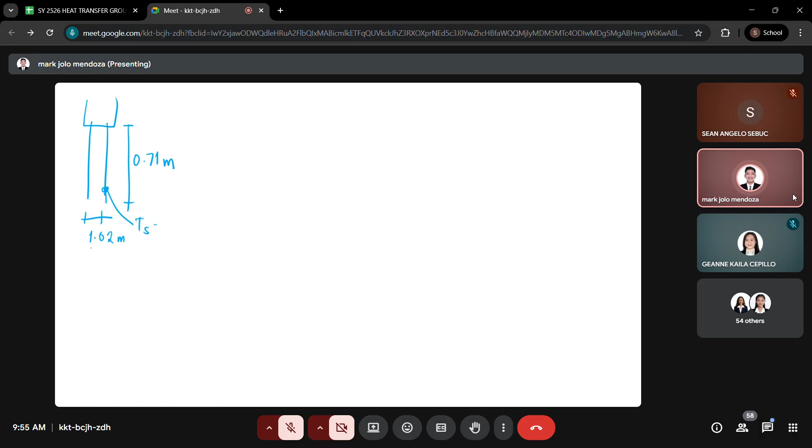And reaches a temperature of 232 degrees Celsius. So ito daw, glass fire natin, this is at surface temperature equals to 232 degrees Celsius.

The other side, itong room natin, if the room is 23 degrees Celsius, 23 degrees Celsius, the room temperature.

We are asked to find for the convection heat rate from the fireplace to the room. Convection heat rate, Q ang tinatanong.

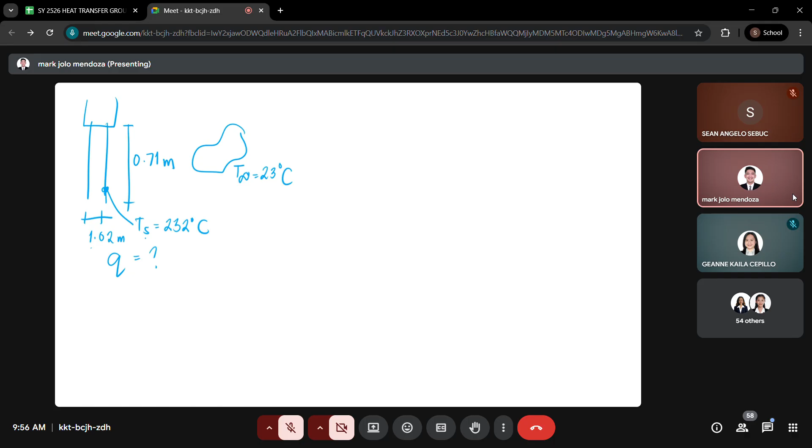Again, meron tayong glass door fire screen. So ibig sabihin dito sa part na to, meron tayong fire dito.

And then meron tayong glass door with a length of 0.71 and height of 1.02 meters, temperature 232 degrees Celsius.

Yung room natin sa opposite side ng ating fire screen is at a room temperature of 23 degrees Celsius.

We are asked to find for the convection heat transfer rate from the fireplace to the room.

So yan yung schematic natin, ganyan yung itsura. So let's have... oops, sorry.

Assumptions natin. Ano yung mga assumptions natin na pwedeng sabihin dito?

First, sabihin natin na itong surface temperature is uniform. Your Ts is uniform on the screen, on the fire screen.

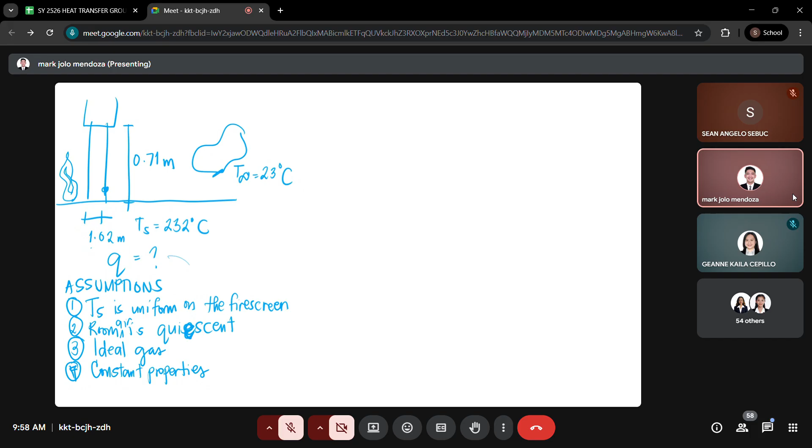Now let's establish the properties. Again, properties natin that we have to evaluate is under the film temperature.

Film temperature, 232 plus 23 all over 2, plus 273. That is...

Equal to 400.5 Kelvin.

Still, this is table A.4 kasi air yung ating kino-consider. You give me the values of your thermal conductivity, kinematic viscosity.

Thermal diffusivity, Prandtl number, and your thermal expansion coefficient.

Sige, para hindi na tayo mag-interpolate, we use 400 Kelvin na, para mabilis. You get the value at 400 Kelvin. Give me the value of thermal conductivity at 400 Kelvin.

33.8 po. That's 33.8 times 10 to the negative 3 watt per meter Kelvin.

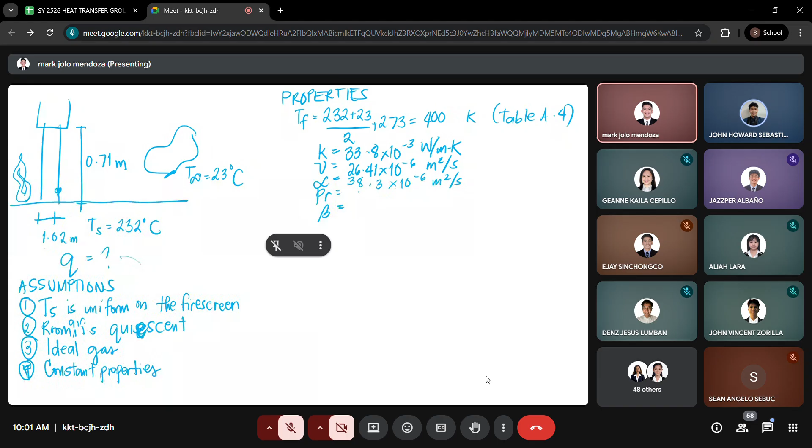Your Prandtl number? 0.690. And your beta. Again, beta is 1 over your film temperature.

2.5 times 10 raised to negative 3 po. Sorry, 2.5 times 10 raised to negative 3, K negative 1.

So we evaluate it now. So again, we are solving for the heat rate, the heat rate. So ano ba ang formula ng heat rate?

What is our convection heat rate formula? That is your convection coefficient times your area times surface temperature minus your fluid temperature.

Since we assume that this is under quiescent conditions, you solve for the Rayleigh's number. You solve for the Rayleigh's number.

Solve for the Rayleigh's number. That's gravity times your beta times Ts minus T ambient, L cube, over thermal diffusivity times kinematic viscosity.

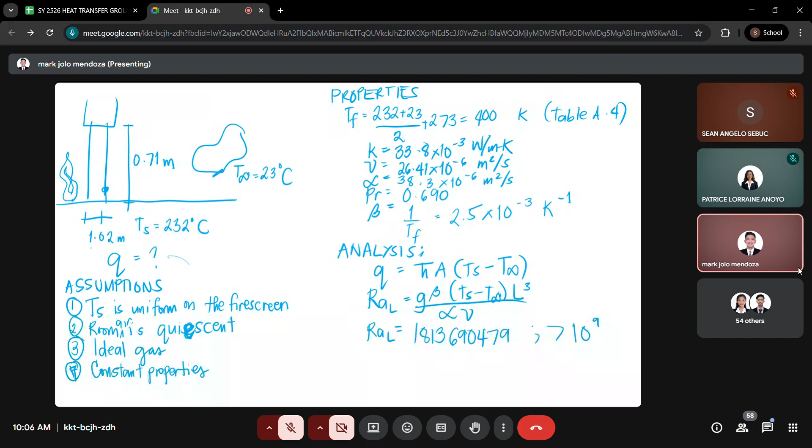This is greater than, di ba? Greater than this is greater than 10 to the 9. This is greater than 10 to the 9. And since this is greater than 10 to the 9,

yung ating formula that we are going to use is the formula of Churchill and Chu. Kasi yeah, we need to correct that pala kasi ito sinulat ba natin yun dito?

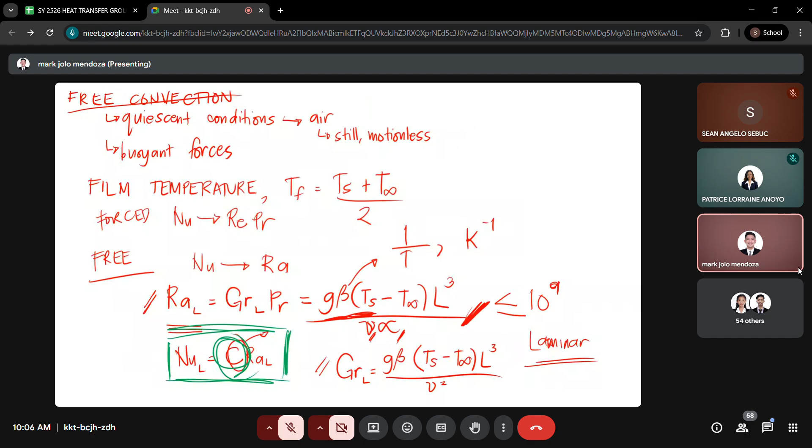Itong formula ni Churchill and Chu, this occurs in transition to turbulent flow. This Churchill and Chu, this is in turbulent flow. That is for greater than 10 to the 9.

Yes, this is for greater than 10 to the 9. Itong formula ni Churchill and Chu. Whereas itong pangalawang formula na presented on page 97, this is for less than 10 to the 9, or which

is in laminar flow. This is for laminar flow. So, we use the correlation of Churchill and Chu dito since siya ay greater than 10 to the 9.

So, we use the Nusselt number using Churchill and Chu. Churchill and Chu.

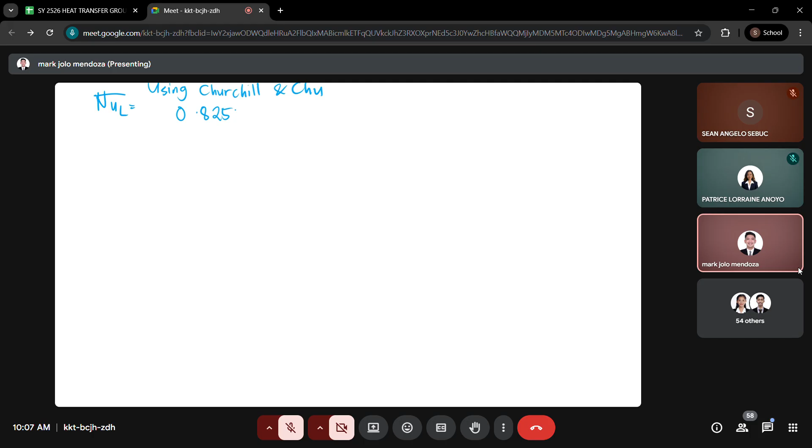We do have 0.825 plus 0.387, RA raised to 1 over 6, over 1 plus

0.492 over Prandtl raised to 9 over 16. Then itong buong ito is raised at 8 over 27. Buong equation is naka-raise sa square. Then you will get the Nusselt number.

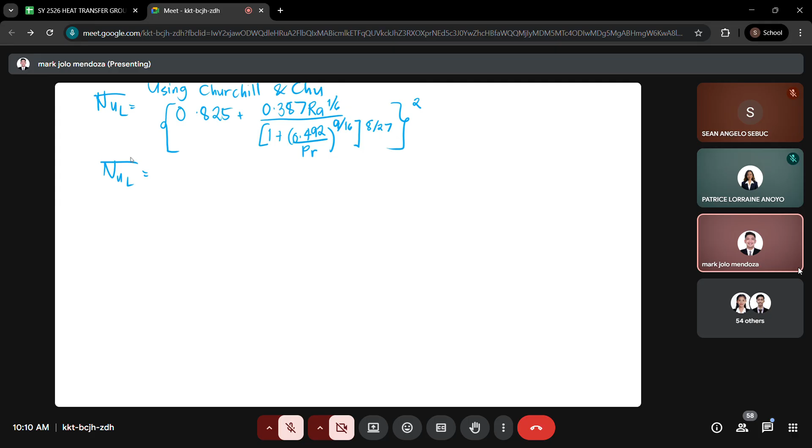What is the value of our Nusselt number? You substitute yung nakuha nating value ng Rayleigh's number dyan. Then we will be having our Nusselt number. That is our Nusselt number equal to

Confirm nga ano pang ibang sagot. Magkaiba yung dalawang sagot. Anong sagot natin for Nusselt number? That's

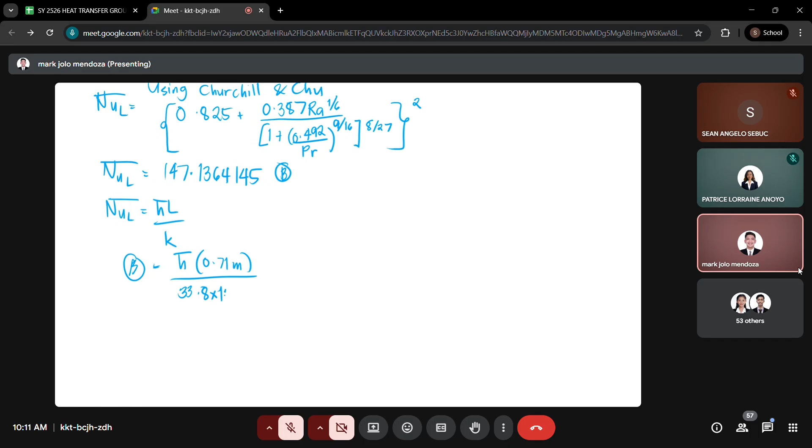147.1364145. Then again, to solve for our heat transfer or your convection heat transfer coefficient, that is HL over K. You substitute, let's say this is your B, substitute B equals H times your length equals 0.71 meters. Your K is equal to 33.8 times 10 to the negative 3 watt per meter Kelvin. Then you will be able to solve for your H.

Anong value natin ng heat transfer coefficient? Excuse me. 7.004522267 watt per square meter Kelvin.

Now you solve for the heat rate. Heat rate equals HA, Ts minus T ambient. Sorry, dito yan. So let's say this is stored in C. So C times 0.71 meters times 1.02 meters times 232 minus 23. 232 degrees Celsius minus 23 degrees Celsius.

We will be able to get our heat rate equal to 1060.18908

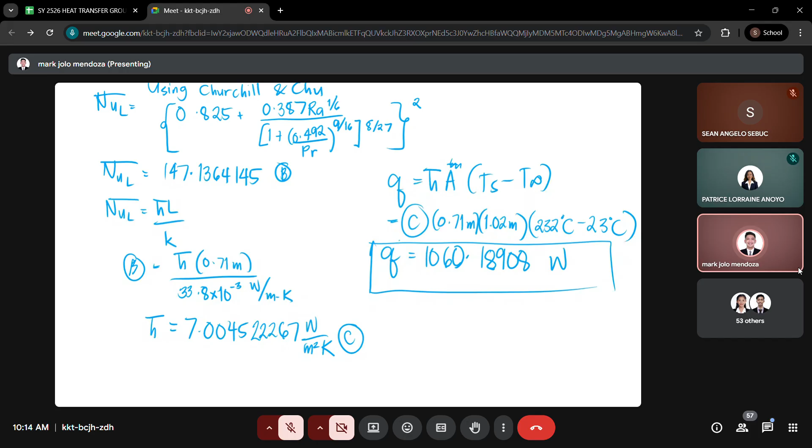So yan. I hope you guys get the same answer. You have to make sure that you understand the correlations. Again, ulitin natin yung mga correlations na na-discuss bago tayo mag-proceed sa third example.

Dito, nasaan yun? Itong formula natin for vertical planes, itong formula na to, itong hx over k, di ba? This is common. We know that this is your formula for the Nusselt number since simula nang discuss tayo ng convection. Itong formula na to, itong other formulas, ito, and ito,

This is when you are going to solve for the local Nusselt number. Again, pag sinabi nating local, you are evaluating at a specific point, X. You do not consider the whole length kapag local Nusselt number. So ito yung formula natin. You consider the Grashof and the Prandtl, or ito, maalin dyan. Again, kapag yan ay local Nusselt number.

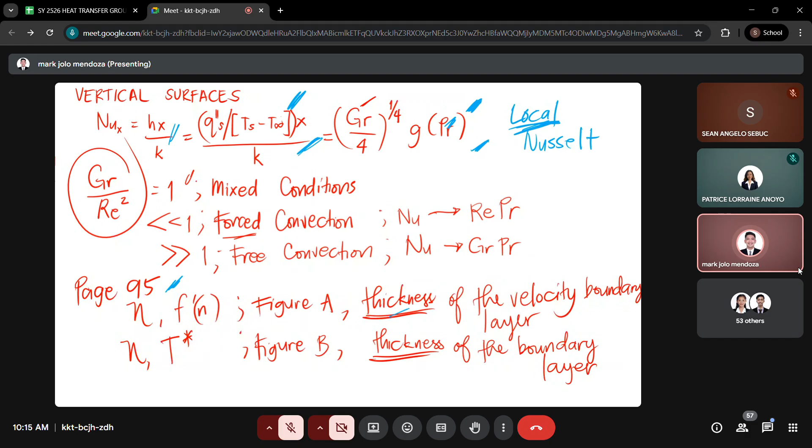Then, kapag ito dito sa page 95, this is when you solve for the thickness of the velocity boundary layer, you refer to the graphs. And then, Churchill and Chu, you use this formula to solve for the Nusselt number kapag turbulent.

This is average Nusselt number. In average Nusselt number, ibig sabihin you consider the whole length, average to, as well as dito. Average din yan. Average. Turbulent or laminar.

Turbulent sa unang condition, kay Churchill and Chu, then yung improved formula is for laminar conditions. And then, if it's inclined or inclined surface, same formulas, it's just that you paltan lahat ng involve ang gravity, you change all of those parameters into gravity cosine theta.

Then, for horizontal plates, presented yan in page 99, whether you evaluate it the upper heated part or the lower heated part. Then, presented din, pag long horizontal cylinder, presented ang C at N on page 101, yung table natin to solve for the Nusselt number, or you can use Churchill and Chu pa din to evaluate the Nusselt number.

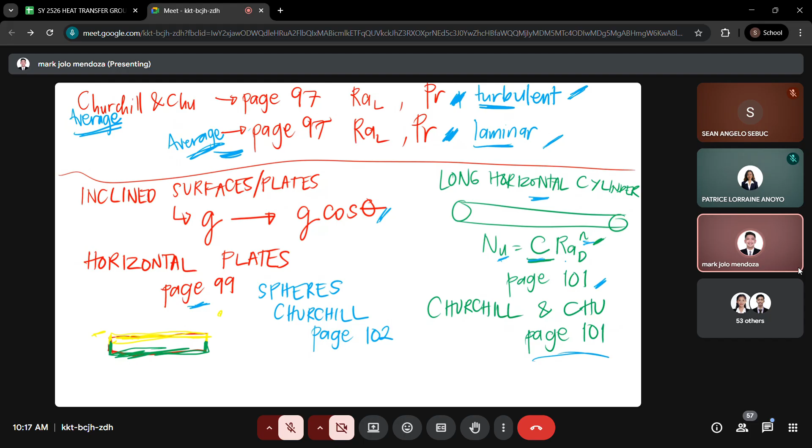Again, it will again just boil down to having the Nusselt number. Ang pinakaiba lang, sa forced convection, your Nusselt number is dependent on the Reynolds number. Dito, sa Nusselt number natin for free convection, dependent tayo on Rayleigh number. On Rayleigh number yung ating pino-consider.

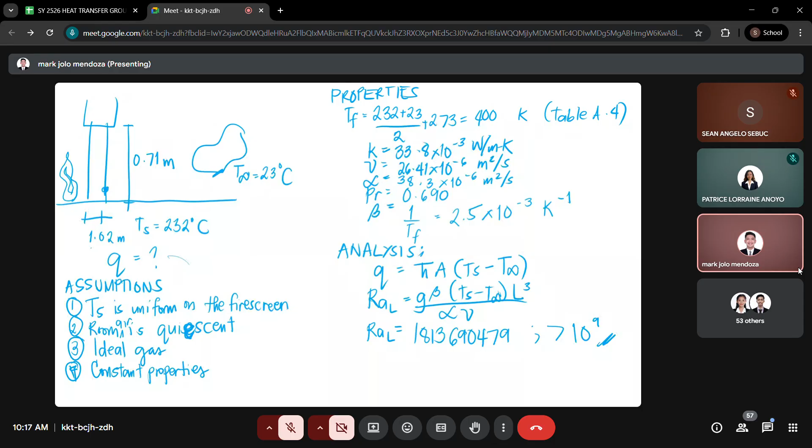Yun. So, I hope you were able to follow with these examples. Let's proceed with the third example. Third example is airflow through a long rectangular heating duct, 0.75 meters wide and 0.25 meters high. So let's have a rectangular duct.

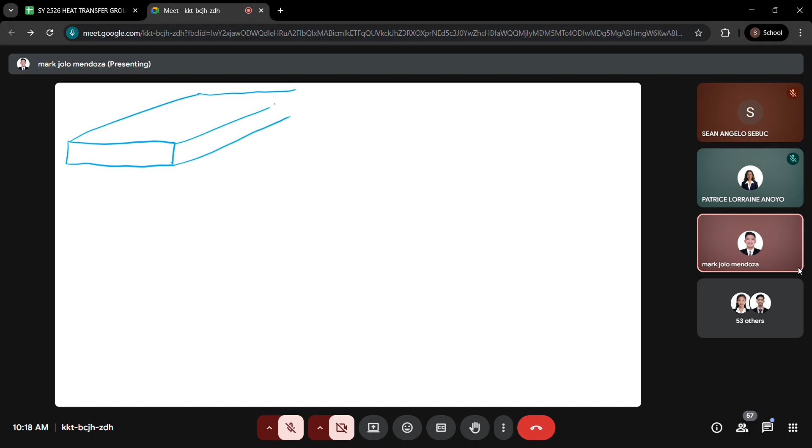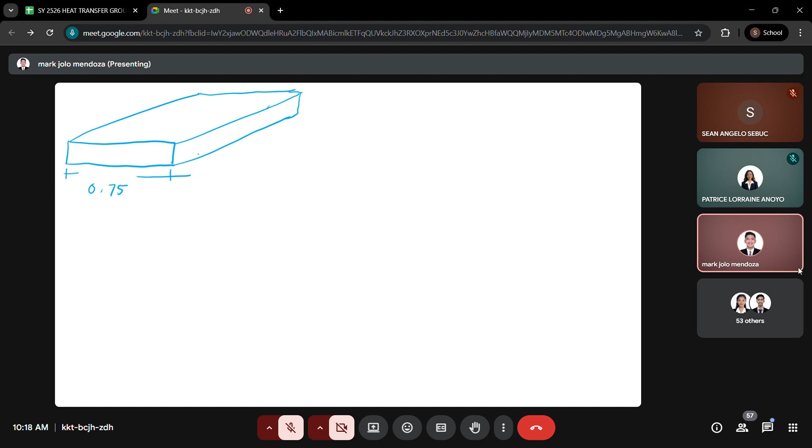That is 0.75 meters wide, 0.75 meters wide, and the height is 0.25 meters.

And maintains the outer duct surface at 50 degrees Celsius. The surface of the duct is 50 degrees Celsius.

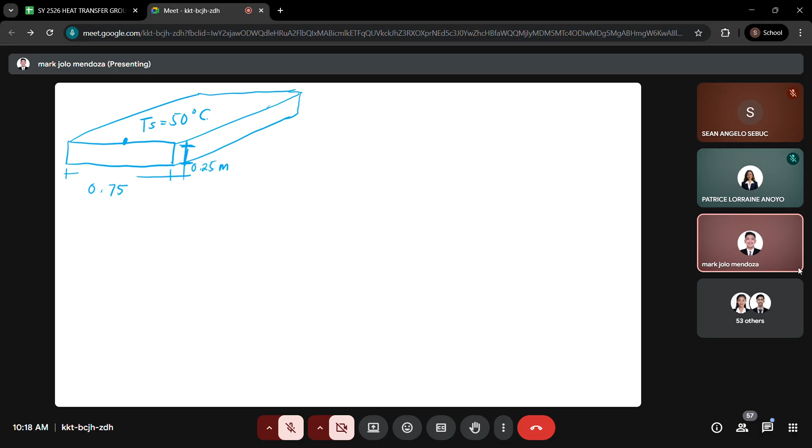If the duct is uninsulated and exposed to air at 15 degrees Celsius in the crawl space beneath a home, it's exposed to air, uninsulated, at 15 degrees Celsius, what is the heat loss from the duct per meter of length?

Heat loss from the duct per meter of length, so that's Q prime. The question is asking for Q prime.

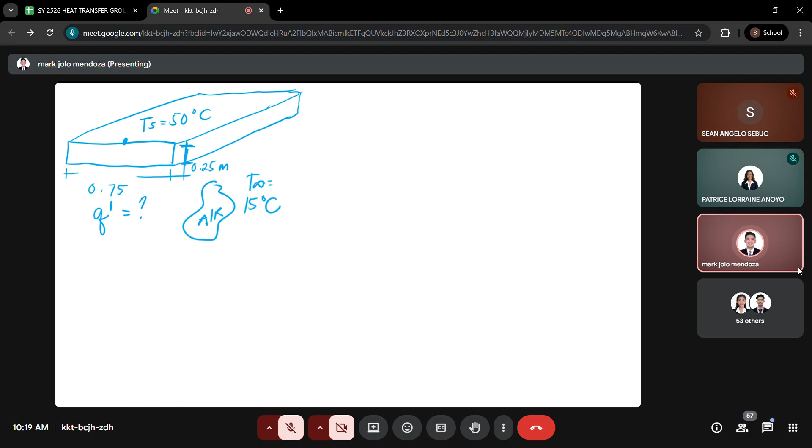Again, we have a rectangular duct that is 0.75 meters width and the height is 0.25 meters. The surface is maintained at 50 degrees Celsius, then exposed to air at 15 degrees Celsius. So we're asked for the heat loss or heat loss per unit length because this parameter wasn't given.

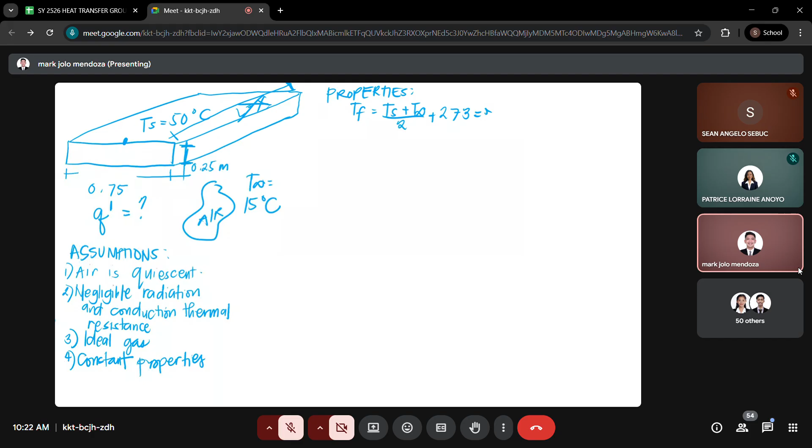From table A.4, give me the values of your kinematic viscosity, your thermal diffusivity, your thermal conductivity, your Prandtl number, your thermal expansion coefficient. Let's have these values.

Give me the value of kinematic viscosity. What is our kinematic viscosity? 16.4433 times 10 raised to negative 6.

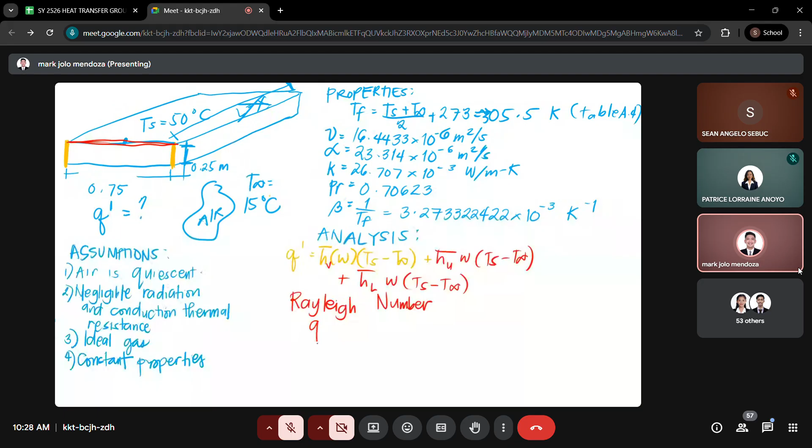This is your Rayleigh number, Ra, equals gravity times beta, Ts minus T ambient, times L cubed, all over kinematic viscosity times thermal diffusivity.

Now guys, since we are not given the length of our duct, you just solve for the numerical coefficient of this. You substitute - so we express our Rayleigh's number in terms of L cubed.

So you substitute: this is 9.81, 3.27 times 10 to the negative 3, this is 50 minus 15, then kinematic viscosity 16.443 times 10 to the negative 6, then this is your thermal diffusivity 23.314 times 10 to the negative 6.

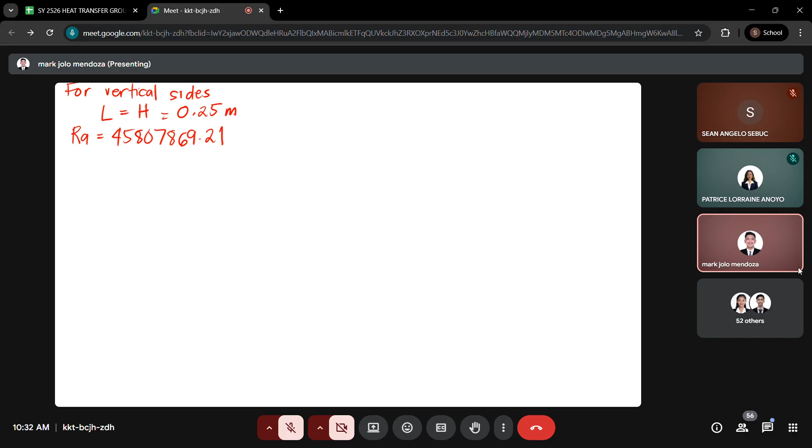Did you also get this one? This is also what came out for you. So, if this is your Rayleigh number, this is less than 10 to the 9. Therefore, this is laminar, right? Less than 10 to the 9. So this is laminar, so you will use to solve for the Nusselt number the second equation from page

95, if I'm not mistaken, that's page 95. The improved equation for laminar is 0.68 plus 0.670 Ra raised to 1 over 4, all over 1 plus 0.492 over Prandtl raised to 9 over 16, raised to 4 over 9.

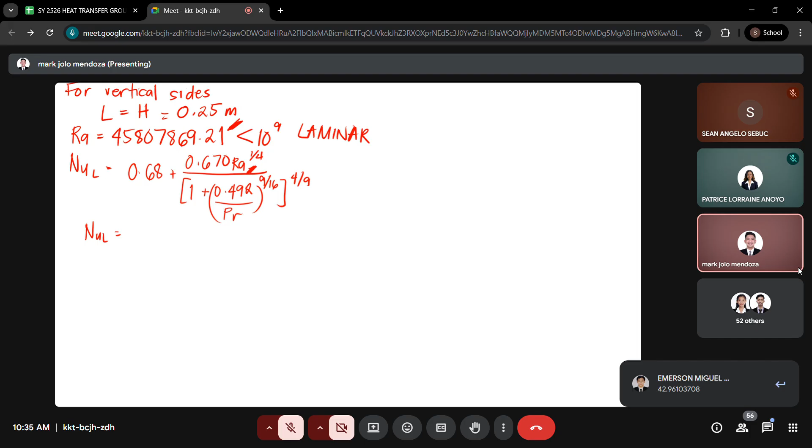So you substitute your Rayleigh number here, substitute it here, then we will get our Nusselt number. Our Nusselt number is equal to... our Nusselt number. Your Nusselt number is 42.96.

103708, 103708. Now again, you solve for your H. This is for the vertical plates: H times L over K, wherein your L again is 0.25 meters here. Then your K is 26.707. You substitute, you get your H for vertical.

Since we have two vertical sides, right? Two vertical sides. So our equation for heat rate per unit length is heat rate per unit length times two, for the two vertical sides. 1, 2, yes. So times 2 pala yon.

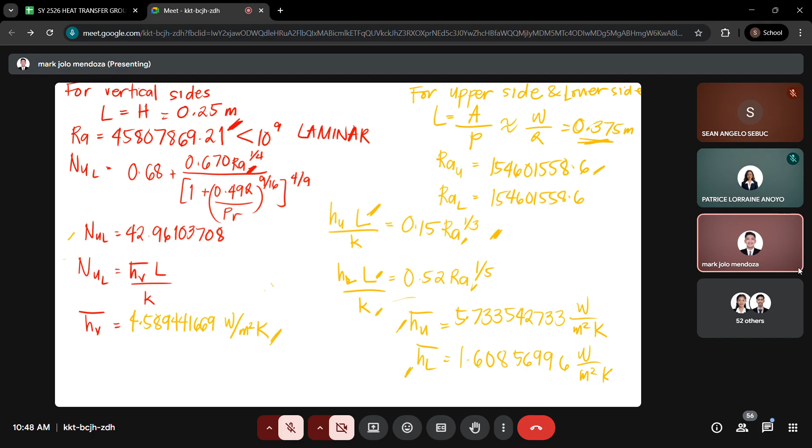Then here is 2 times HV, 4.58. You complete the values plus HU, 5.73, plus HL, 1.60. There, you solve for your heat rate per unit length.

What would be our heat rate? Heat rate per unit length. What's our heat rate per unit length?

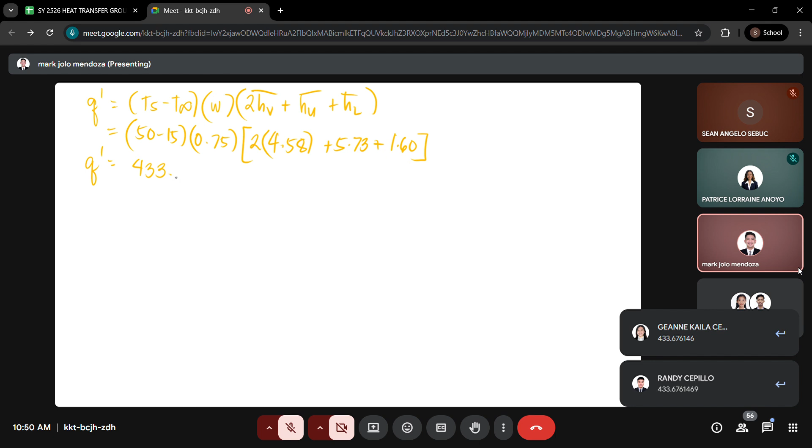Four three three point 676, 1469 watt per meter. So this is your heat loss per unit length.

So that is how you solve this one for the horizontal plates. You need to consider the vertical sides and the upper and lower surface, depending on the position of your plate. So it's a bit more tedious compared to the vertical plate, but still, it's the same process. You always have to solve for the Rayleigh number, then the Nusselt number, then you get the heat rate.

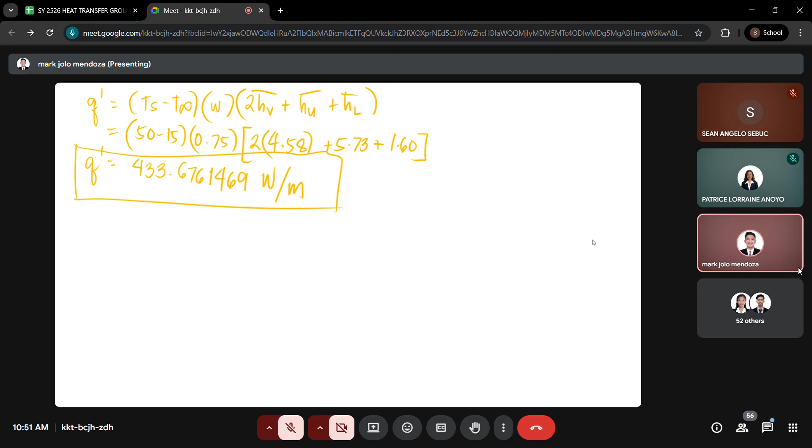We have one more problem. That's for a long horizontal cylinder. This is going to be the last problem.

Last problem. A horizontal high pressure steam pipe of 0.1 meter outside diameter. We have a pipe here of 0.1 meter outside diameter. This one is 0.1 meter outside diameter.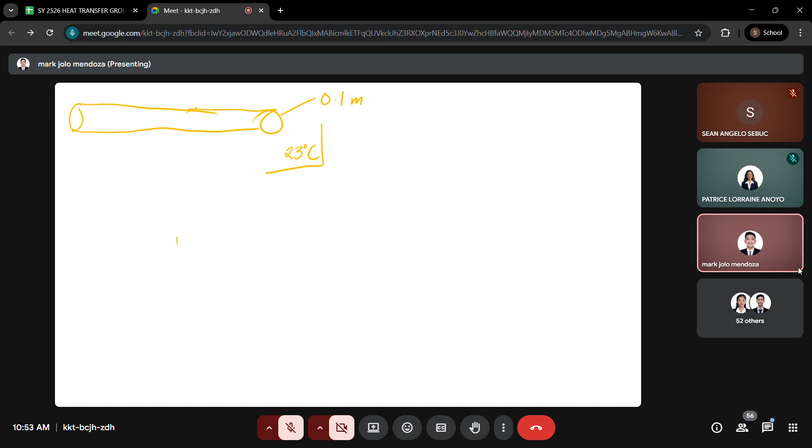Passes through a large room. Let's say this is your room, it's inside. Whose wall and air temperatures are 23 degrees Celsius. So this one is at 23 degrees Celsius. This is your room, and inside the room there is a pipe. The pipe has an outside surface temperature of 165 degrees Celsius, so this is TS equals 165 degrees Celsius.

And emissivity of 0.85. So we are asked to find the heat loss from the pipe per unit length, heat loss from the pipe per unit length. So that's still your Q prime, heat loss per unit length.

Again, we have a pipe inside the room, which has a diameter of 0.1 meters. Room temperature equal to 23 degrees Celsius. TS, your surface temperature of the pipe, is 165 degrees Celsius, with an emissivity of 0.85. We are asked to find the heat loss from the pipe per unit length.

So again, our assumptions, still the same. Uniform surface temperature of the pipe, uniform TS, constant. Then your room air is quiescent.

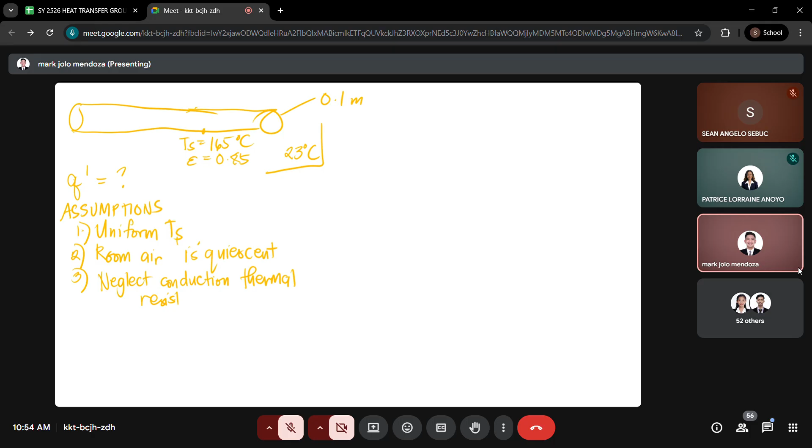Then the third is we just neglect conduction, neglect the conduction thermal resistance of the pipe, because again we do not know the material of the pipe, so we neglect the conduction thermal resistance. Then ideal gas and constant property.

Since we are given the emissivity of the pipe, we are going to consider radiation in our solution. Therefore, later in our analysis, that's going to be convection plus radiation. But before that, we solve for the properties.

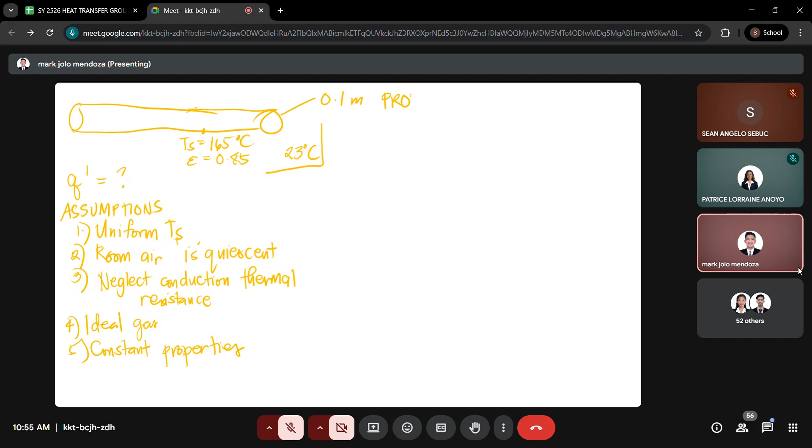We solve for the properties. Your TF is 165 plus 23 over 2, plus 273, equals, give me the values of this. This is at 367 Kelvin.

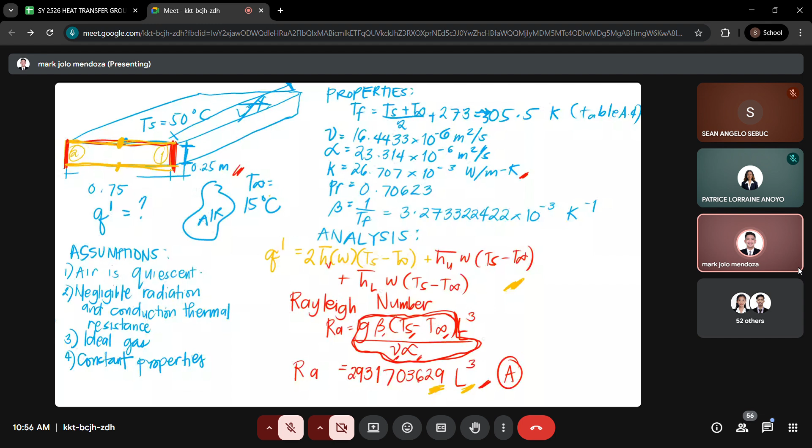Give me the values of your kinematic viscosity, K, alpha, Prandtl, and beta. What else is missing there? 1, 2, 3, 4, 5. There, give me the values of this. Double time, guys, double time. Give me the value of your kinematic viscosity.

22.7866 times 10 to the negative 6. Your K, give me the value of thermal conductivity.

31.292 times 10 raised to negative 3 watts per meter Kelvin. Thank you. Your thermal diffusivity.

Thermal diffusivity is 32.756 times 10 raised to negative 6. Your Prandtl number is .6966.

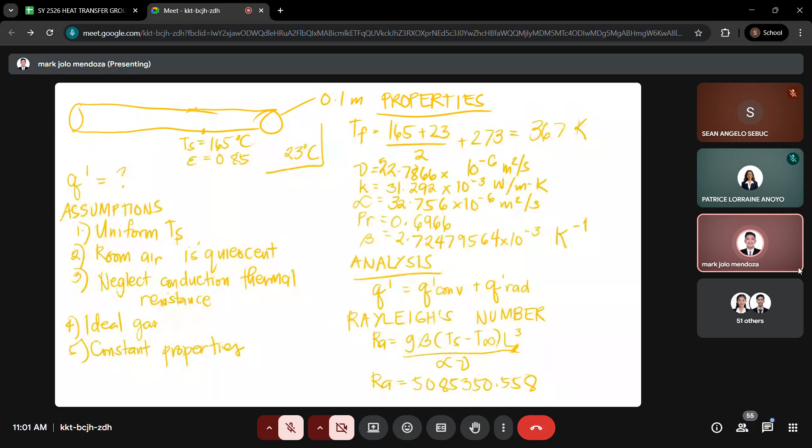Therefore, we can use the correlation by Churchill and Chu para sa long horizontal cylinder, using Churchill and Chu.

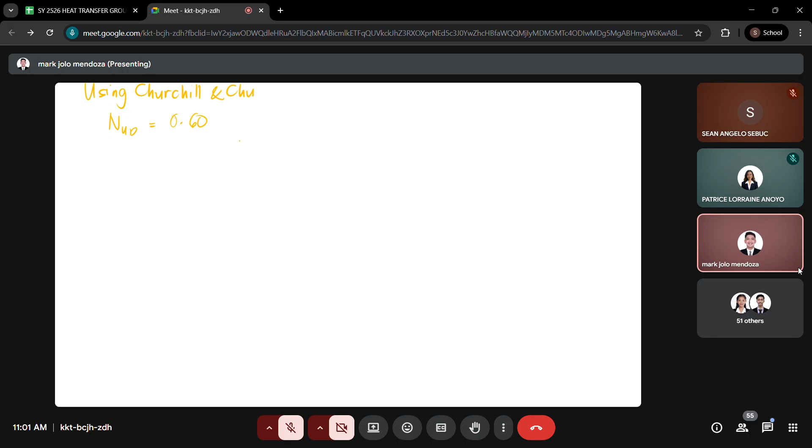That is your Nusselt number equals 0.60 plus 0.387 Rayleigh to the 1 over 6, all over 1 plus 0.559 over your Prandtl number, to the 9 over 16, to the 8 over 27, square. Naka-square tong lahat.

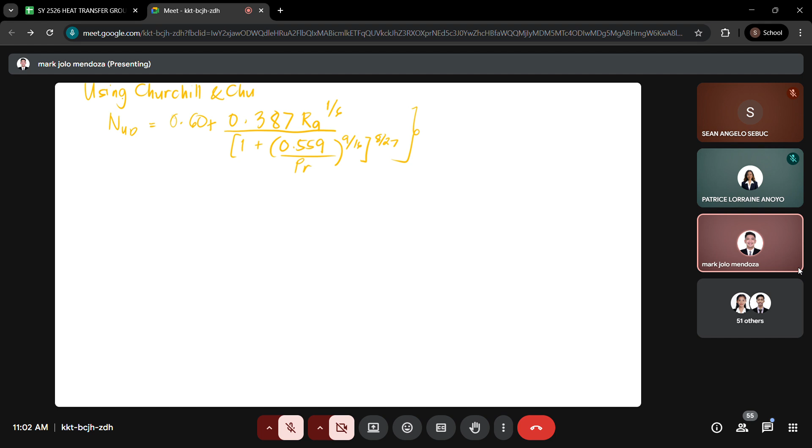So again, pawiin na natin tong Nusselt number dito. Where is this Nusselt number? We equate this into HD over K, diba? That's just the same, HD over K. You substitute your D, your K, and your Rayleigh number and your Prandtl number.

Then give me the value of our convection coefficient. Give me the value of H, then we'll solve for Q convection.